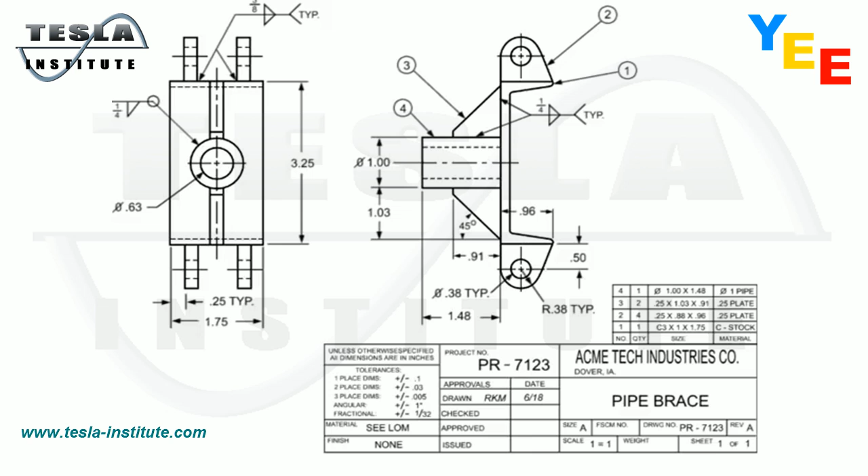Engineering drawings and blueprints are a type of graphical language that communicates ideas and information from the engineer who designed a part to the workers who will make it. The graphical images in the field of the drawing are generated using a variety of line styles. Acceptable quality and consistency of the lines used to create blueprints is critical to accurately depict the final product.

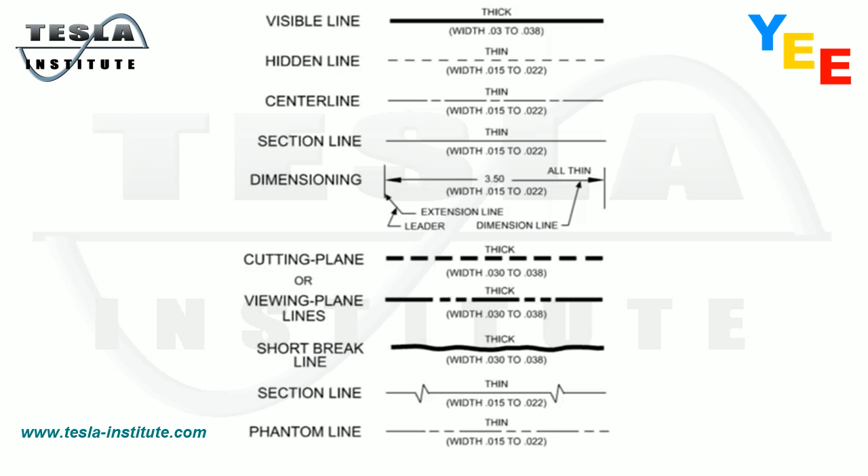The lines described herein are merely conventions. Each drawing specification may have its own types and standards. Visible lines, sometimes called object lines, represent the edges or lines on an object. They are solid lines with a thick weight.

Hidden lines consist of short dashes, evenly spaced. These lines are used to show the hidden features of a part. They begin with a dash in contact with the line from which they begin, except when such a dash would form a continuation of a full line.

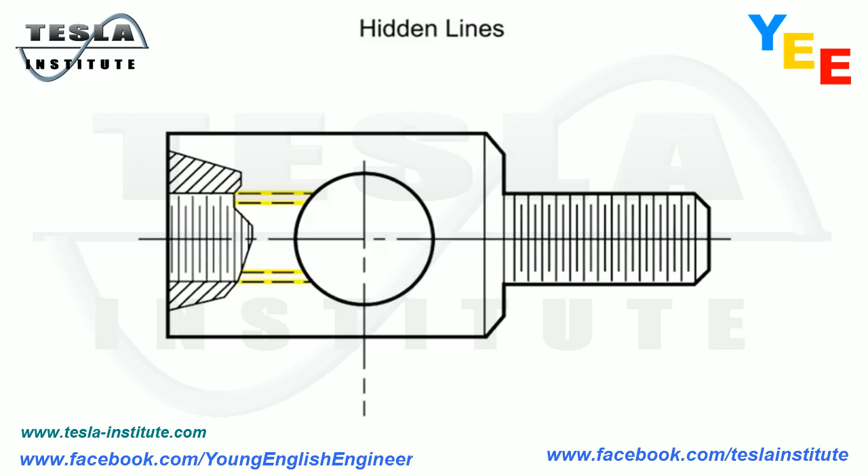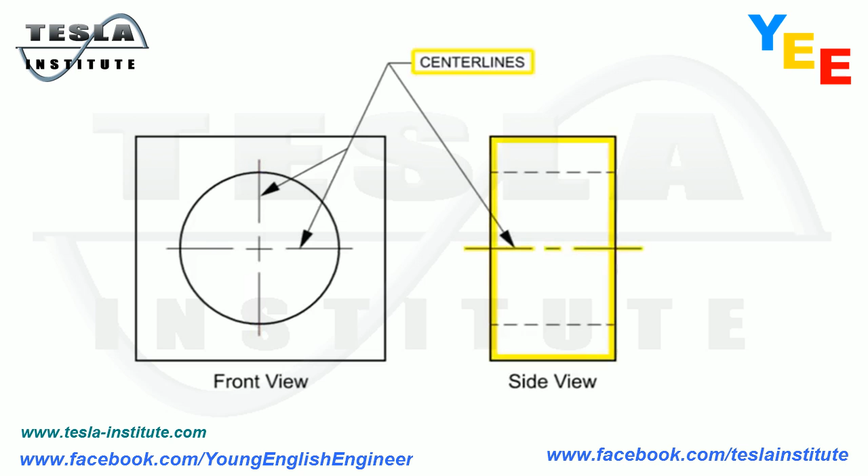Center lines are composed of long and short dashes, alternately and evenly spaced, with a long dash at each end. Very short center lines may be unbroken if there is no confusion with other lines. On a front view, center lines cross without voids. A center line can also mark the center of a hole on a side view. Hidden lines are used to show the extent the hole reaches into the part.

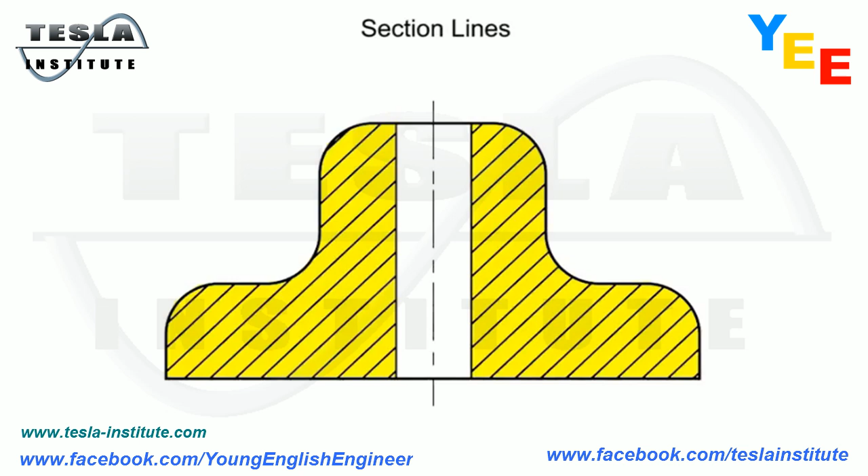Section lines are used to indicate the exposed surfaces of an object in a sectional view. They are generally thin, full lines, but may vary with the kind of material shown in section. Section lines are typically used when showing details of a part, where using hidden lines would be confusing.

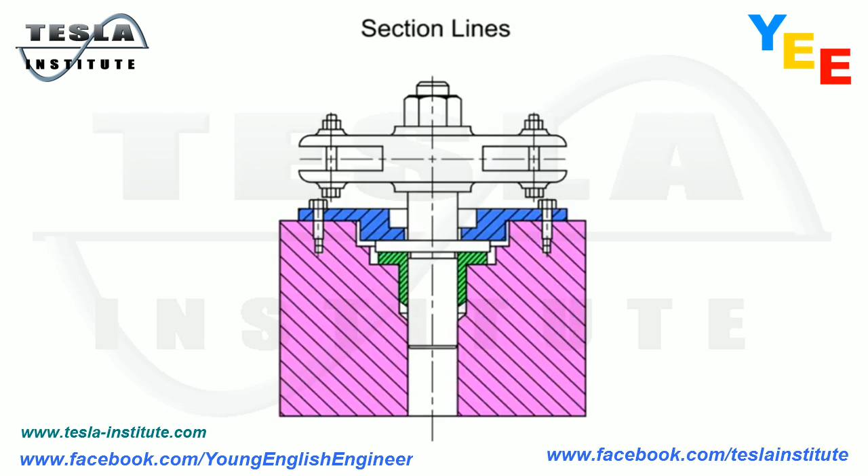Section lines illustrate where material would be if the part were sectioned or cut, as if with a saw. Different patterns or direction of lines indicate different sections of the object. Dimension lines typically terminate in arrowheads at each end and include the dimension of the part within the line. They are unbroken except where space is required for the dimension.

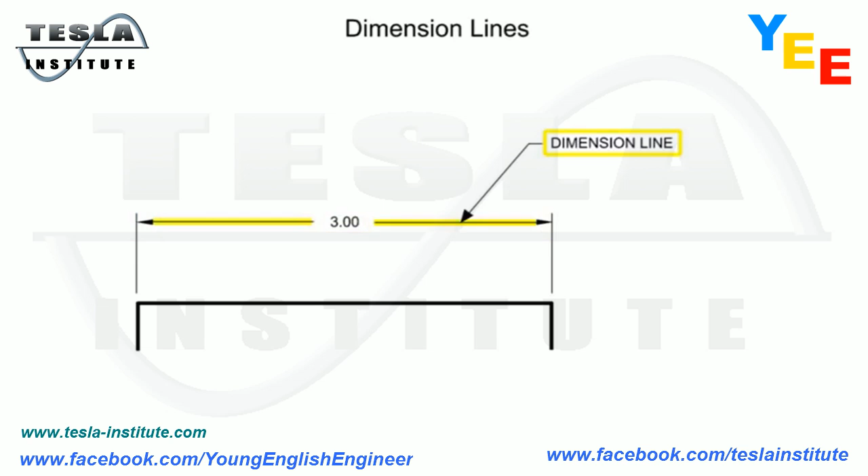Extension lines are used to indicate the extension of a surface or to point to a location outside the part outline. They start with a short, visible gap from the outline of the part and are usually perpendicular to their associated dimension lines. They help illustrate how far a dimension extends.

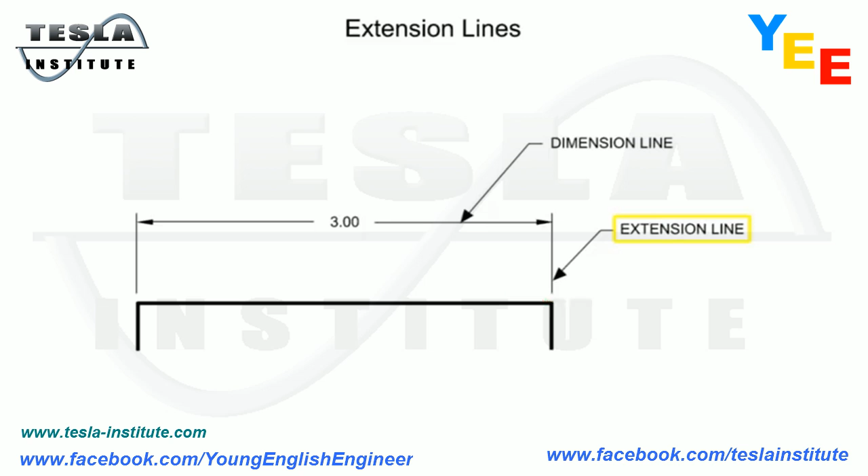Leader lines are used to indicate a part or portion to which a number, note, or other reference applies and are typically unbroken lines terminating in an arrowhead. The most common use is when a dimension won't fit within the dimension line.

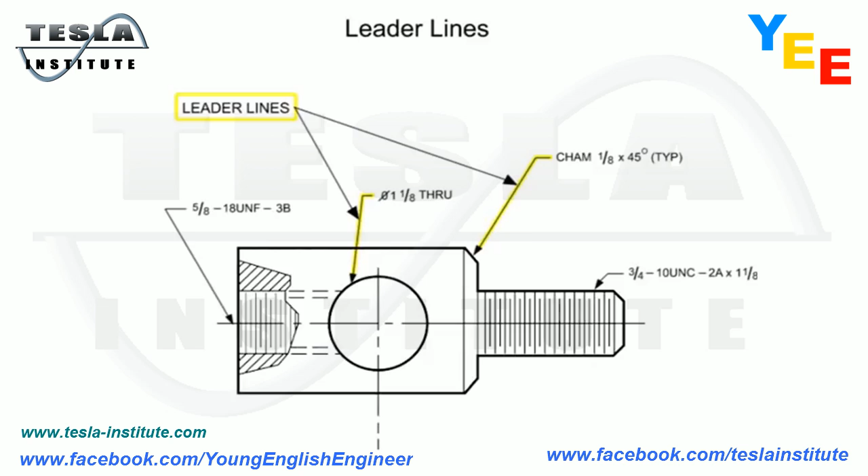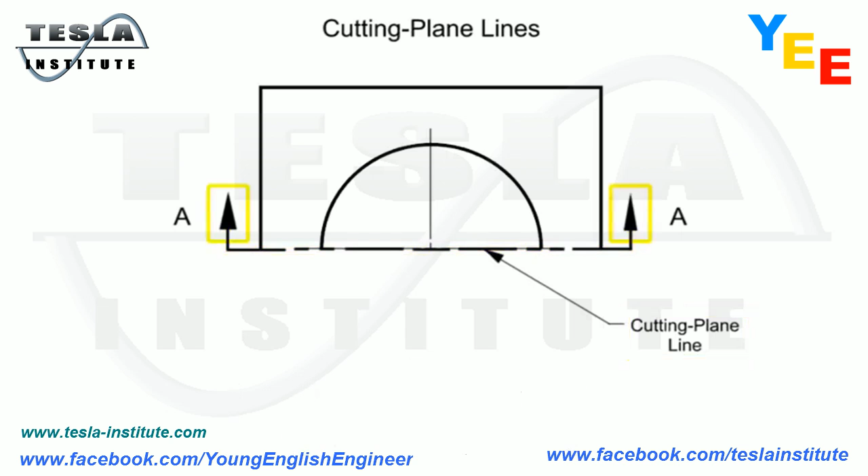Cutting plane lines are used to indicate a plane or planes in which a section is taken. The arrows at the end of the cutting plane line indicate the direction of the view, or the direction your eyes look after the cut is taken.

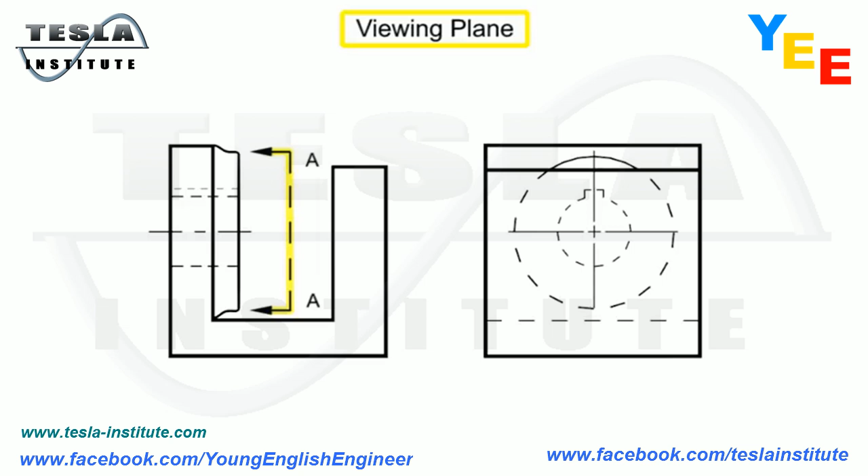A viewing plane line is a line that indicates a special type of detail view. A viewing plane line is very similar to a cutting plane line, but it does not actually cut the part or generate a section. A viewing plane line is used when an interior view of the part is helpful in illustrating characteristics, but a full section view is not required.

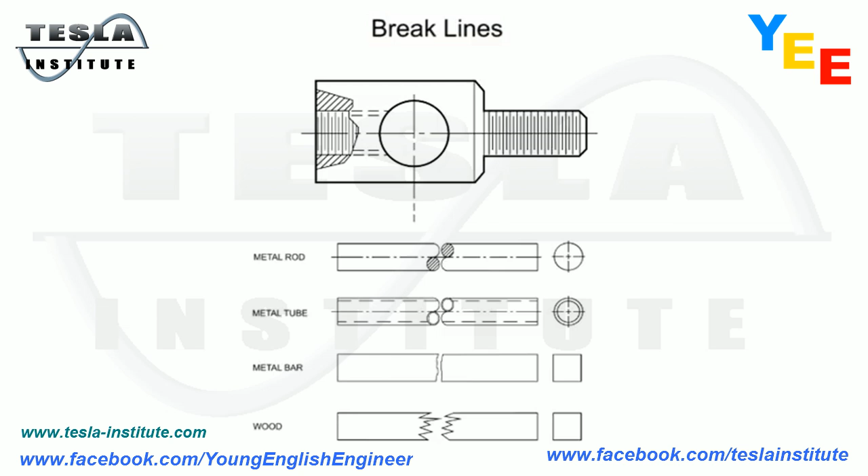Break lines are used when a portion of the piece shows no useful information, and removing it is either convenient to save space or will allow further details to be illustrated. There are two types of break lines. Long break lines are typically full ruled lines with freehand zigzags that are used to show breaks in shafts, rods, tubes, rope, and so on, which have a portion of their length broken out for convenience.

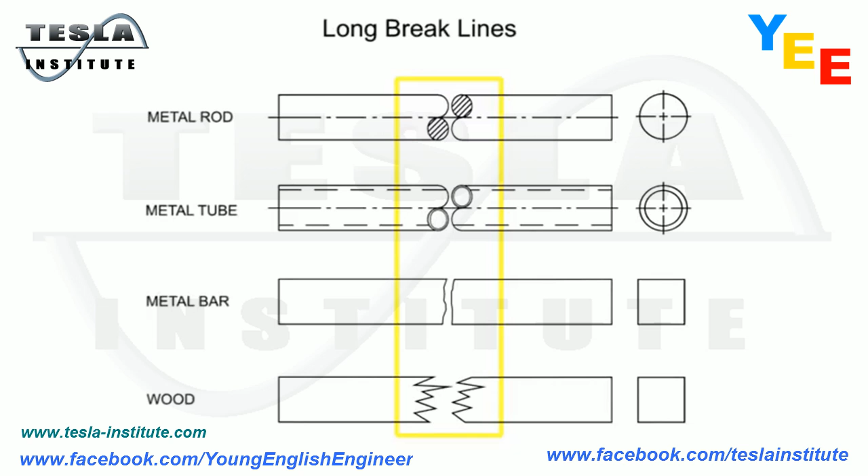Short breaks are indicated by solid freehand lines and are typically used to illustrate smaller section views where removing material from the part illustrates features otherwise not shown.

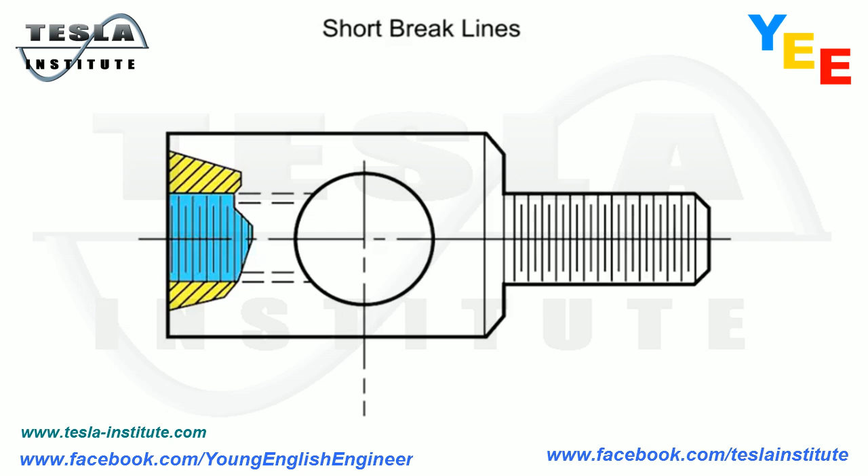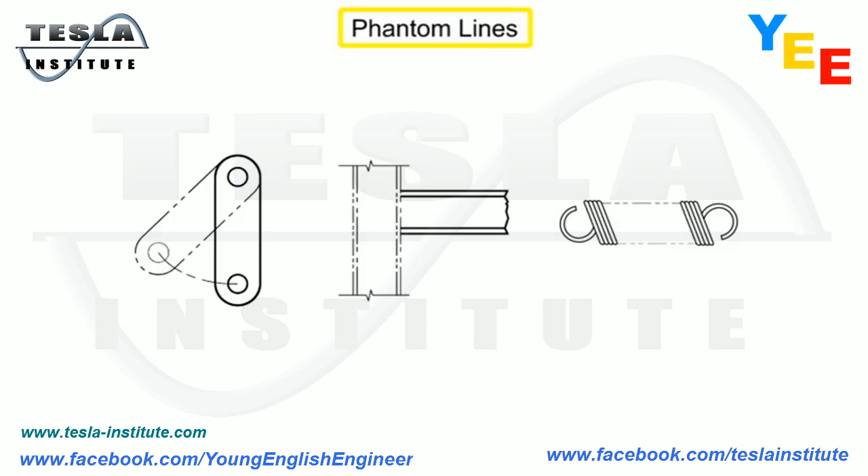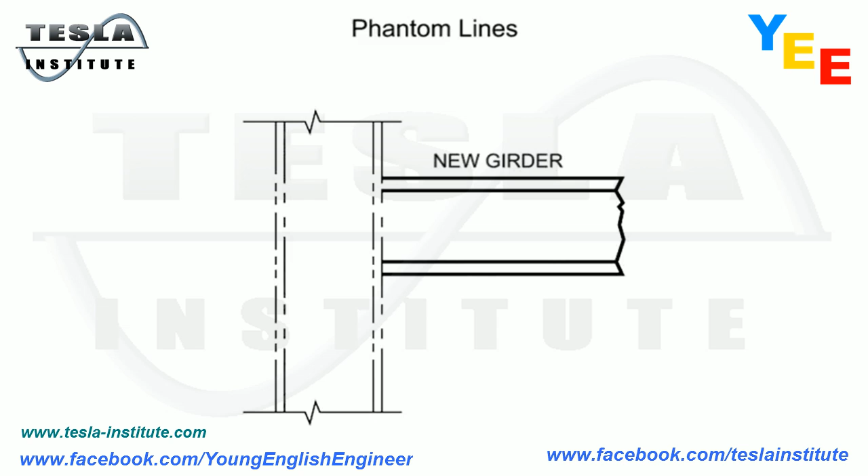Phantom lines are composed of alternating one long and two short dashes, evenly spaced, with a long dash at each end. They are used in three ways. The first is to indicate the alternate position of moving parts. The second way phantom lines are used is to illustrate the position of related parts to better show how the part interfaces with existing or missing parts.

Finally, phantom lines are used to show repeated detail. In this view, a spring is depicted. Since the coils of the spring are all the same, it's not necessary to draw them all. Instead, phantom lines are used to illustrate that the coils continue as originally shown.